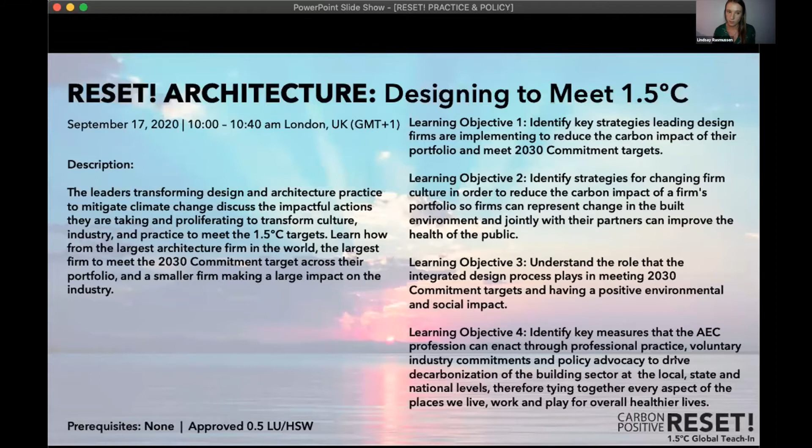Dr. Christine Lemaitre is a pioneer of sustainable building. As CEO of the DGNB, German Sustainable Building Council, Christine has set the course for better planning and building culture in Germany for almost a decade. She has been a member of the board of directors for the World Green Building Council between 2016 and 2020, and had the chair of the Europe Regional Network. She's a co-initiator of the global initiative Building Green Futures and received the Eco Innovator Award from the Global Green Economic Forum in 2019.

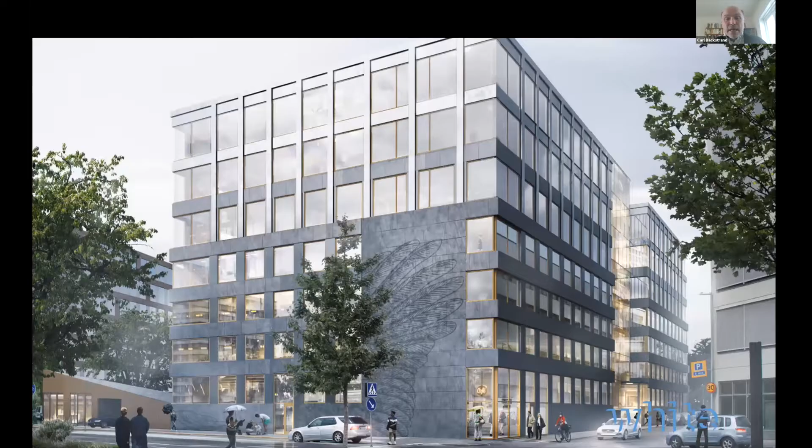Another example from Uppsala, just north of Stockholm, where two existing office buildings from the 70s are being transformed into new premises. In this project, from the start the idea was to pull them down and build new on this site. However, we managed in discussion with the client to convince them we should go for a transformation and try to recycle as much of the materials as possible from the existing buildings.

Some figures to show the benefit: this cut carbon emissions compared to new build by 3,800 tons, and we also saved approximately $10 million in cost savings on the project. One aspect of that is that construction time was reduced by 2 years compared to demolition and new build, and we all know time has a lot of effect on cost.

And then, of course, using more wood in the construction. We all know the embodied carbon, how that can make a huge change in the life cycle carbon of the building.

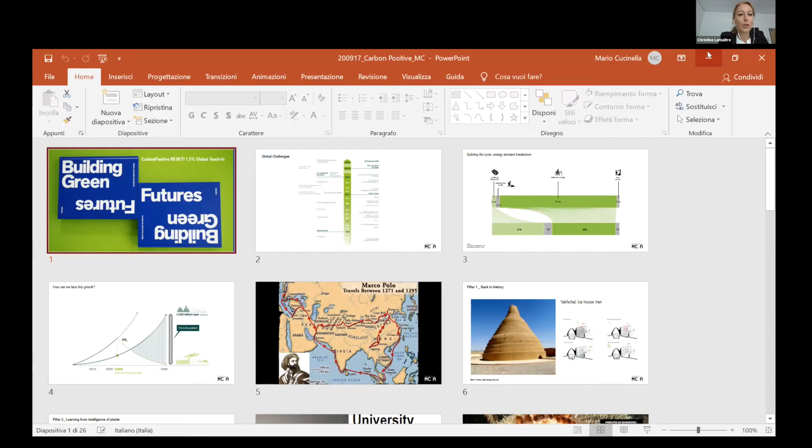Today I'm going to go through these slides very quickly. A lot of data, the problem, the complexities of these challenges - I think everybody is well aware of it. I'll try to talk about some of our work, things we've been doing for the past 10 years, and some of the lessons we're learning.

Hopefully I would be able to inspire people to understand that this is a challenge that we can realistically take on and emerge winners against. So as a firm, we are founded on this mantra that there's this binarity to architecture where it's either hurting or helping depending on how we engage with it.

And I think many on this group are part of this movement of architecture because we believe in that. More specific to the topic we're talking about here today, this is how you could relate to what we're talking about. The reason we try to frame some of these bigger topics into very simple statements that sober up, is to understand what's really at stake, because this is the goal.

I think it has been simply put, we all understand it. The goal is to limit global warming to a very specific target that everybody understands by a specific date. There are two steps to do that: we need to reduce our emissions by half by a certain date, 2030, and then we need to reach net zero by 2050. I think this is very simple, it's very clear.

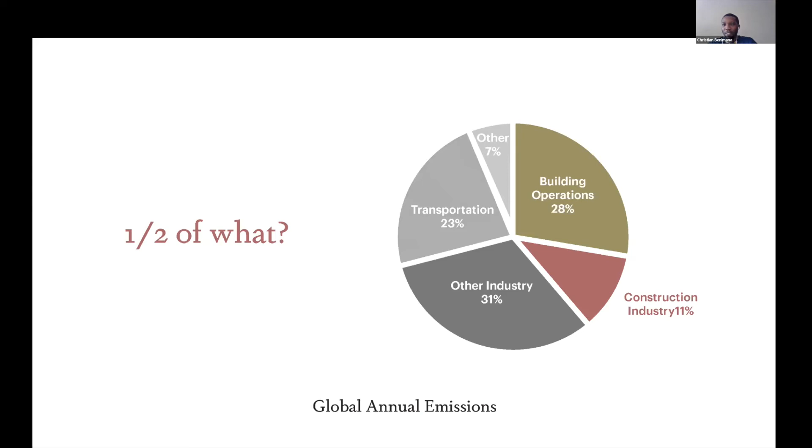So what does it really take for us to reduce our emissions by 2030? What do we have to do? The simple answer, if you think about it, is we need to go back to passive systems and also address what we're putting into the building - embodied carbon. So starting with back to passive systems, what does that look like for us?

When we designed this project, Butaro Hospital, back in 2008, in an area that did not have electricity, and it was one of the poorest places on the planet, but there was an ambition to design a state-of-the-art hospital.

I think the context kind of took care of the restraining condition that required us to think about passive systems. But in addition to that, it's very mind-boggling that we are celebrating this today. The way we were building thousands of years ago is New York Times newspaper worthy in this century.

All of these scientific targets that have led us to imagine complicated air conditioning systems are actually things we can achieve with really minimum types of intervention, allowing us to achieve maximum or minimum air changes per hour required in a hospital to function properly and control infections, while still using passive systems as much as possible. So this is very possible.

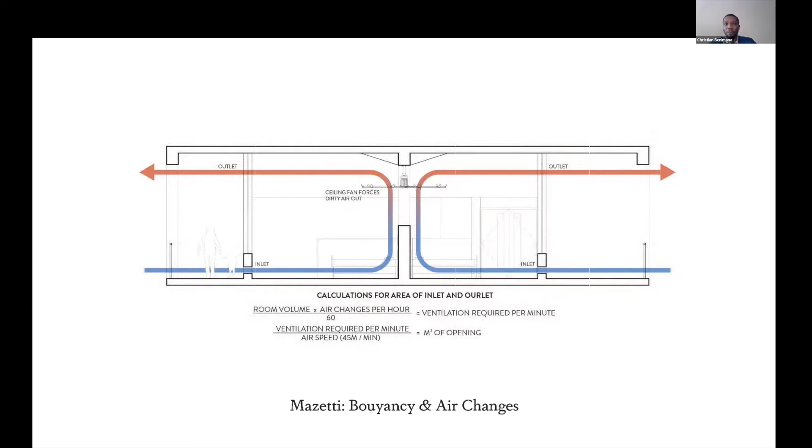Obviously this hospital needs to be elegant, it needs to function properly, but at the same time it pushes us architects to think further on how these lessons can be enshrined into laws and policies that allow many facilities to begin utilizing this at scale.

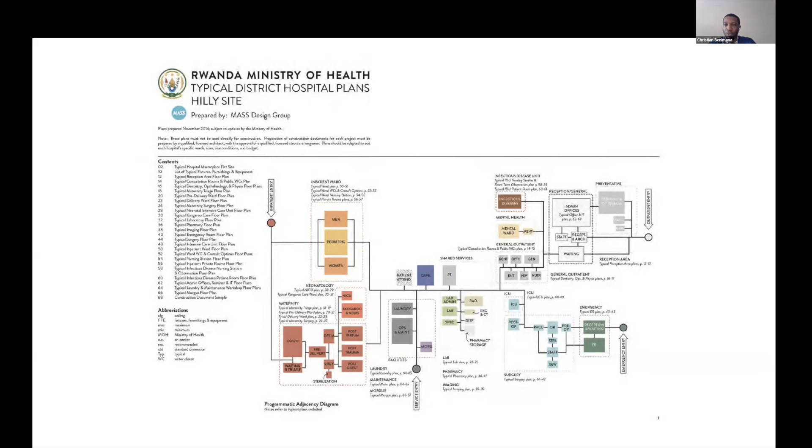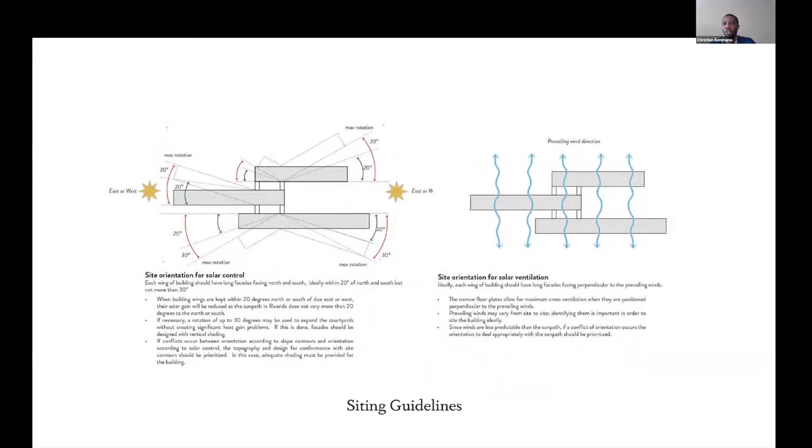This is a project we worked on with the Rwanda Ministry of Health, trying to understand how hospitals would start taking over these lessons and implement them into their guidelines, so that existing hospitals going through retrofits and hospitals that need to be built in the near future do actually prioritize this as a matter of policy and law.

This project is going to be completed this month, and it's built with the same principles. This is another hospital building in the south of the country, with similar DNA, requiring it to be as passively ventilated and as passively lit as possible.

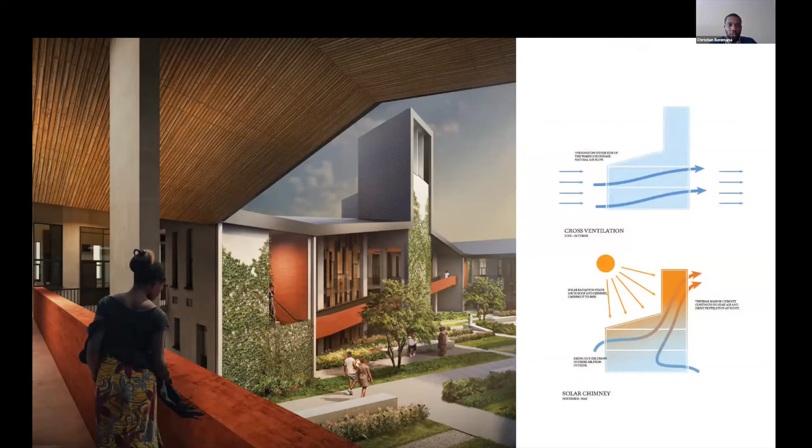This is another example, built in an environment much hotter and more humid than Rwanda, but it still proves this is possible, as it's been done 1,000 years ago in countries like Iran, what was Persia at that time, with Persian architecture that we're all familiar with.

So now, how do we reduce the carbon footprint? For us, that means we need to match the carbon footprint with the human handprint. If we say the embodied carbon is mostly associated with the materials that go into our buildings, then we cannot separate the skills that mine, transform, transport, and fix these materials into the architecture we talk about.

So what does that look like for us? It's dialed down to the same principles we've seen in other movements such as slow food or slow fashion. It has to be good, that everybody deserves it—it's a matter of social justice. That architecture has to be good, inspirational, beautiful, award-winning. It has to be clean.

Obviously this is the most talked about part, when we can quantify the numbers and say this material, at the end of factory fabrication, has this rating in terms of environmental efficiency or embodied carbon. And then most importantly, it has to be fair.

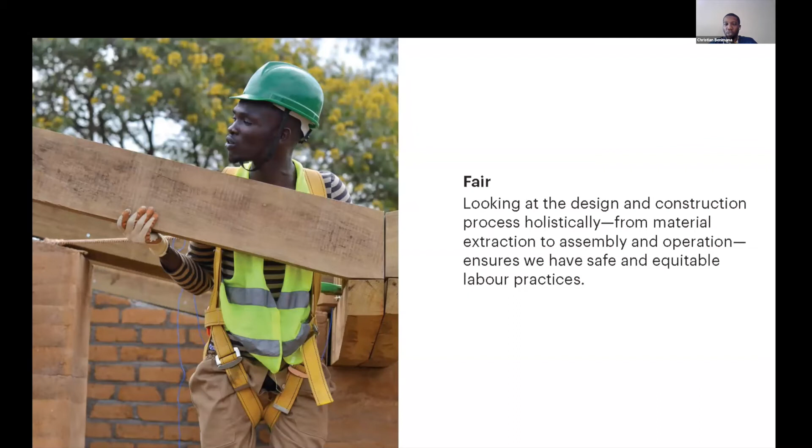And what that means is we need to look at this process very holistically—understand who mines these materials and where they come from, how they get transported to our sites, and who benefits from the entire process. This good, clean, and fair approach, we think, is the right methodology to allow us to reduce by half the embodied carbon targets we have.

So how does this footprint-handprint look in our own projects? The same hospital project I was talking about, in a rural, remote area, has this beautiful volcanic stone because it's in the volcanic region. Out of that process emerged really good talent that allowed us, by the time we finished building Butaro, to do an audit and find out that 10 years ago, we were already achieving the goal set for our next 10 years.

So this is possible even without being intentional—just focusing on making sure that what we do is good, clean, and fair as a process of deploying architecture. So it shouldn't be very difficult to replicate.

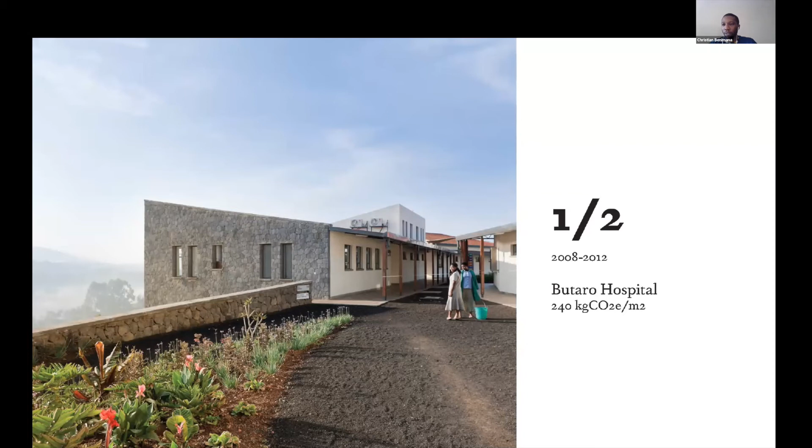And having done that, now we've committed, and I urge everyone here who's in private practice, as Carol just said, it's up to us businesses to figure out how a business model embraces this and figure out how to integrate it into our own practices.

We've taken stock of all our projects to try to understand where we are, and we are pleasantly surprised that it was half of the global average across all our projects, and we aim to continue pushing that bar down as much as we can.

Now, that is doable and it's well and fine, but what about reaching net zero? What does that mean and what does that look like? For us, it really boils down to four main points: we need to conserve intact landscapes, we need to restore ecological functions, we need to figure out how to supply foods to us as a society responsibly, and lastly, we need to grow our buildings.

And what that looks like for us can best be represented with this project that I'm going to talk about, set again in my country of origin, Rwanda, where in less than 30 years, we've reduced our natural environment by more than 50%.

Because we were looking for farmland, and the population is expected to double by 2040. So we are expecting that in 20 years from now, we're going to require lands twice the size of the country to be able to feed ourselves. So how do we figure that out, and our country is not growing. So how do we figure out that challenge?

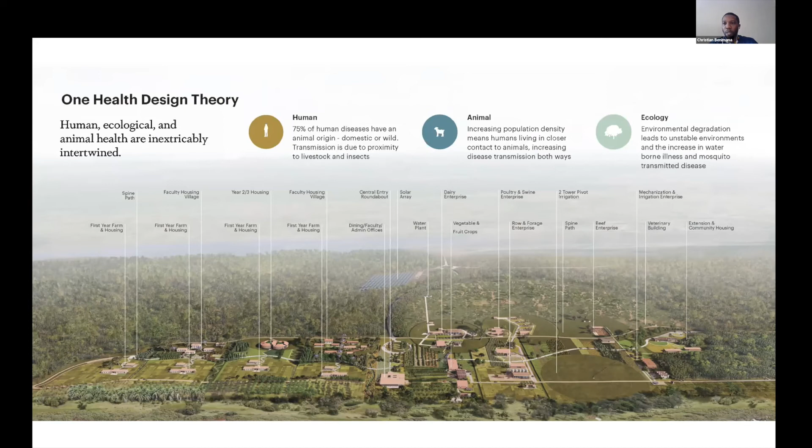To figure out how we achieve that balance, this is something that people in the fields of veterinary sciences and ecological sciences have kind of understood and have put into practice for a long time, but hasn't really trickled down into construction. So how do we also make sure we participate in that process the same way?

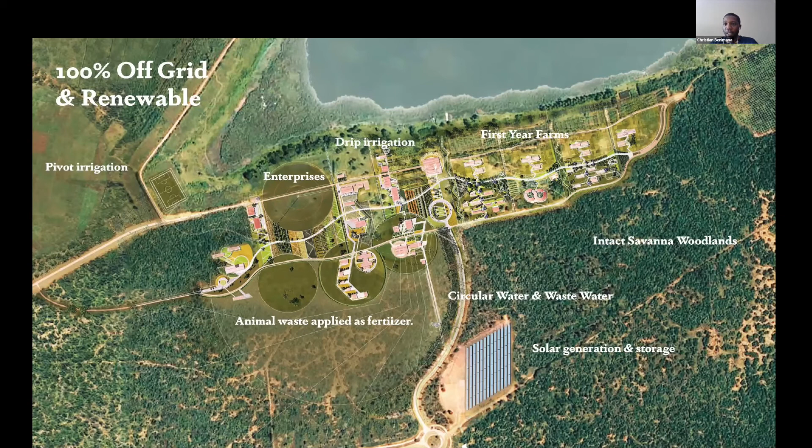So landscape conservation, restoration, and regeneration is something we started looking at from the outset, looking at where the buildings are going to be and how the entire campus from a master plan scale and standpoint is 100% off grid. And that takes care of reducing our operational carbon significantly, in trying to meet that half as soon as possible.

But more importantly, the embodied carbon—we need a very big mind shift into what goes into our buildings and how they're built. What are the elements of the architecture and what makes it? So we are going to be able to achieve this, but not with business as usual. We need to change fundamentally how we understand the supply chains that make our buildings.

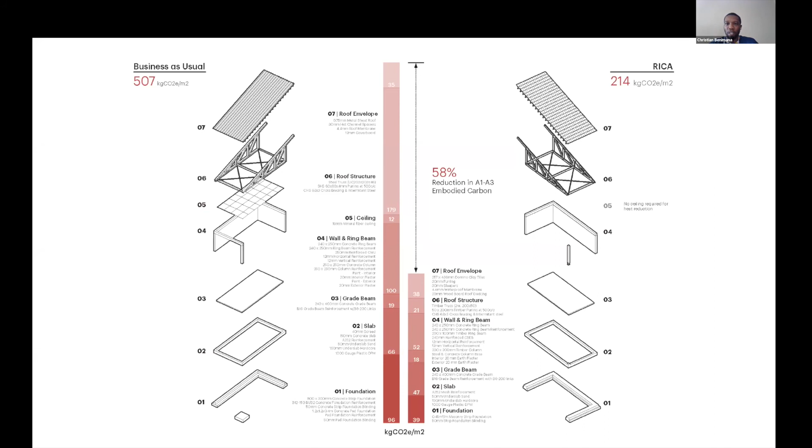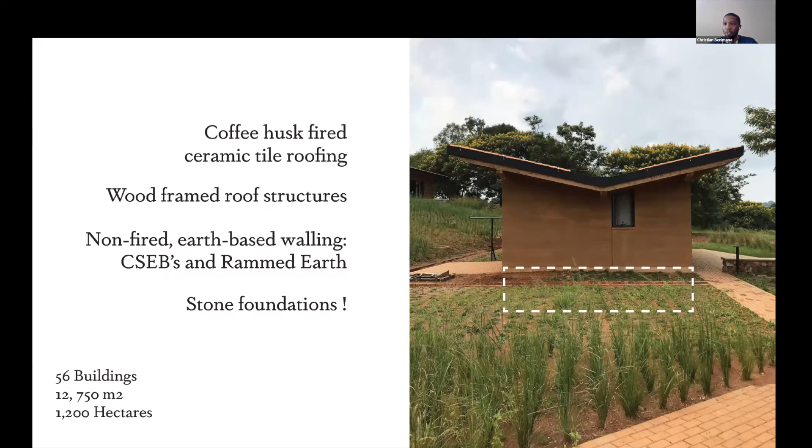And for us, what it looks like is to go back to how we used to build hundreds and hundreds of years ago. Figure out how we used to fire clay bricks, how we used to source materials for structures using wood, of course sustainably harvested, using earth for construction and stone foundations. So minimizing as much as we can on cement and steel.

Sourcing labor, of course, as close to our construction site as possible. Rethink finishes so that we do not continue to consider that speccing materials from catalogs from factories in China and Turkey is going to help us get there. But also making sure that the trades and materials that are fundamentally not embraced in the construction industry are actually brought into this industry to help reduce some of these things.

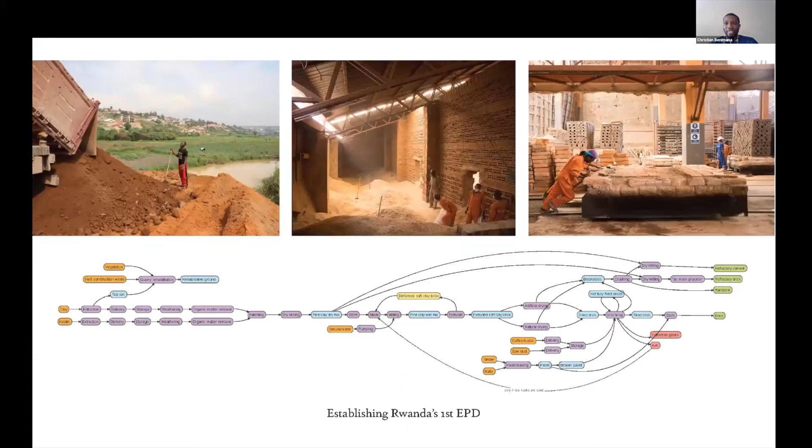Okay. Sorry, am I going over time?

Yes, and Mario, I think, is still back, and we just have, yeah, then 10 minutes, so 8 minutes for Mario. It's a fascinating presentation, I could listen all day, but yeah, unfortunately.

It's all right. I just want to say this last thing about this project is that we anticipate that we're going to be carbon positive on this project in 6.05 years from now.

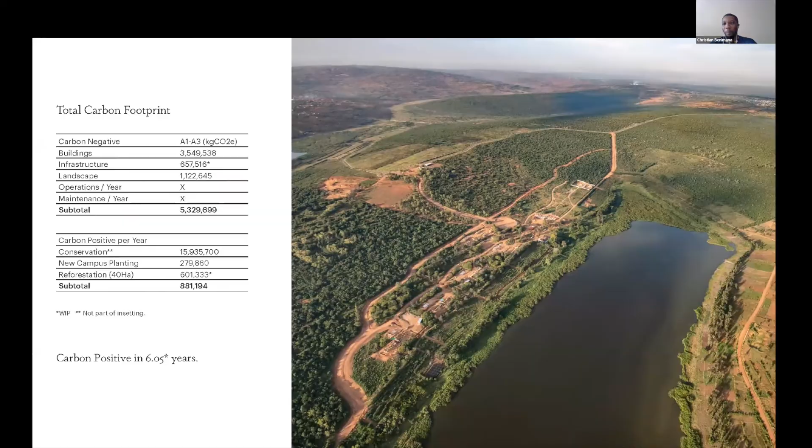Okay, so we will check back on that. Thanks a lot, Christian, and sorry for cutting in. It's digitally always a bit challenging.

Mario, are you on? Yes. Yes, we hear you. Can you share your screen? Great, yes, I'm doing now. So now you have to be 8 minutes precise. Yes, and I think there's almost no time for Q&A, but we'll see. So Mario, please.

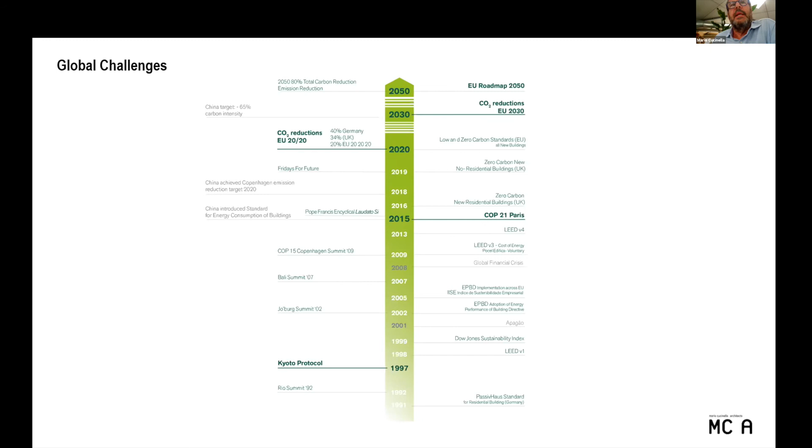But the question I want to raise is that in the last few years we've been concentrating on the performance of buildings - the kilowatts of buildings. We're already at a good point to make new buildings very high performance. But with this diagram, our research group is discovering that if the life of a building is 70 years, 47% of the CO2 emissions already occur in the construction process - the material and the way you build - and only the remaining part is about performance. So the idea of using and reusing material is quite fundamental for the future. We need to concentrate on materials, construction methods, and performance - these two things need to work together.

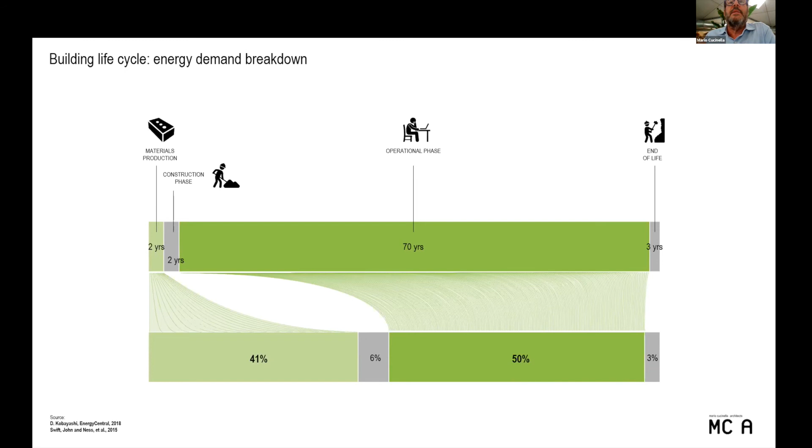But the paradox of this situation is that the curve of CO2 is still growing, the population is still growing, and Europe said we want zero energy buildings by 2050. So this is our problem - the gap between the ambition we have and the program we have. How are we going to do that? Today we've listened to a few colleagues who are really working on this, but I want to raise a point.

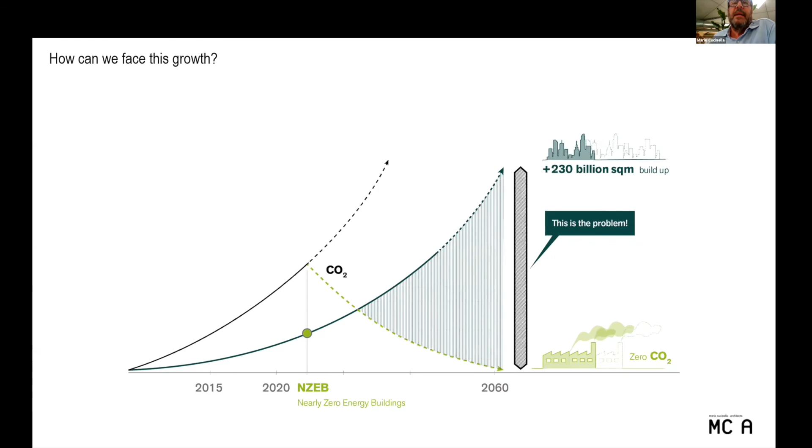If we want to do buildings with zero energy, maybe we need to look also to our past - before energy. How did we build for many centuries, how did we make buildings with high performance and very empathetic with the climate? So I want to tell you two little quick stories.

That for me is the lesson from the past. We don't want to do that again, but I like the idea that if we look to the future for a completely different approach in building, maybe we need to also study our past, when architects were able to find this complicity, this empathy with the climate.

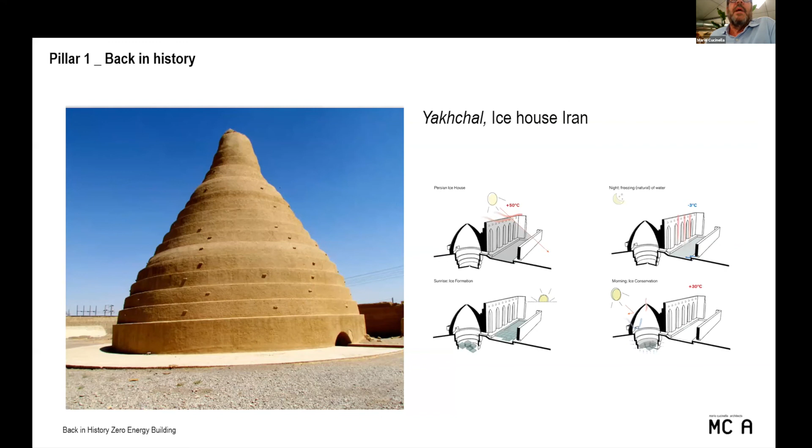Another thing I'd like to raise is that we always look to the future, thinking we're going to find some solutions there. Why don't we look around us? Plants and buildings have the same problem - they don't move. When you make a building, it doesn't move. Plants are the same. They've been on the planet for 400 million years and have adapted to climate because they're not able to move. So they create conditions - the shape, the leaves, how they look for roots, how they find material. It's very intelligent.

If you look at the work of Stefano Mancuso, a scientist working on the intelligence of plants, you discover that plants have intelligence because they know where they are. They know how to adapt themselves to climate. If you look at buildings, on the other hand, buildings are not intelligent at all.

To make a building work, you need to put in machines and use energy, so the building is not intelligent itself. But I'm sure if we study well, we can make a different building, because we control the material, the shape, and the relation with energy outside, to make our building intelligent without too much technology. Maybe the lesson from the past tells us a story about how we can find knowledge.

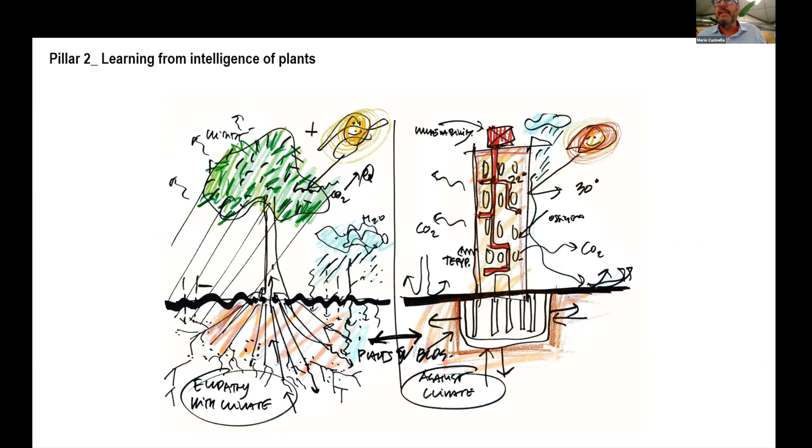That's what we need: knowledge, not technology. Maybe we should study what is close to us, plants. They tell us a lot about adapting to climate. I'm just quickly showing a project we did in Morocco, inspired by cactus.

Also, the spines are not only a defense against animals, but they catch humidity in the air and bring the water inside the plant. You can imagine how many thousand years it took for plants to be designed and adapted to extreme climate. For me, that's a very interesting lesson.

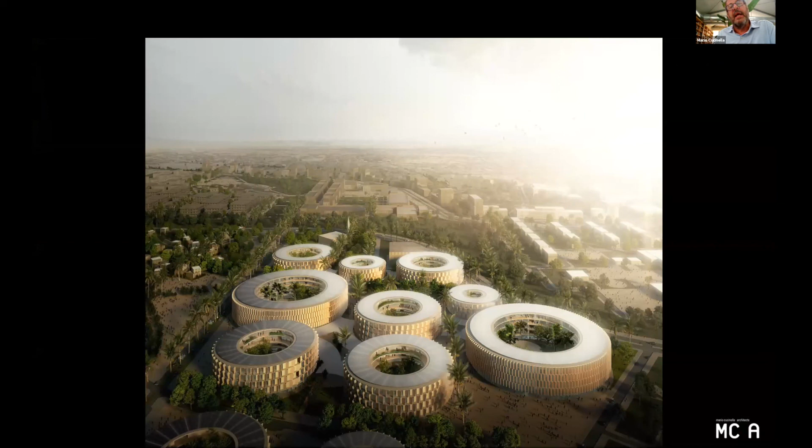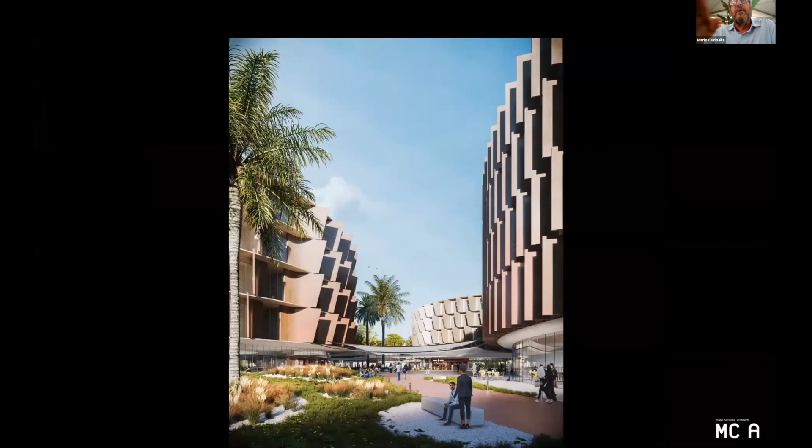Maybe we need to study a little bit more what is close to us. So this is a campus, not a cactus of course, but the oasis in the middle is where we concentrate water and plants, and the shape of the facade is in terracotta, in clay. Clay can absorb humidity and release it later, cooling the building. So there are so many inspirations from the vegetable world, the plants around us.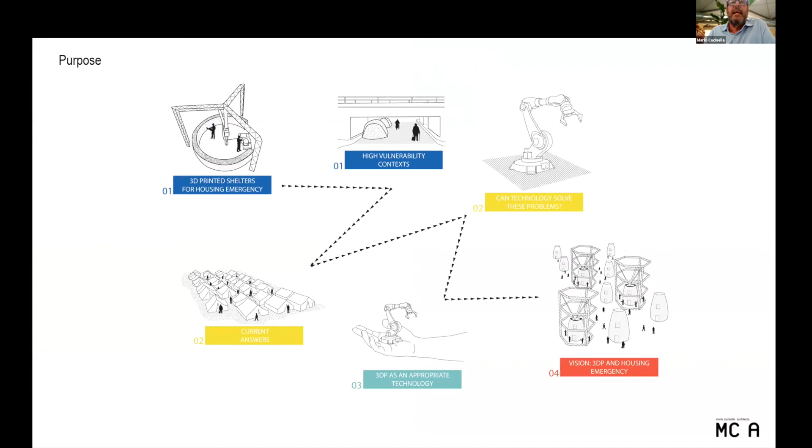How we can design a building in different climates, in different latitudes, and use technology to make that better than a tent or a container. So that's the idea: you make a hole in your land, put in the machine, and design the building adapting to different latitudes.

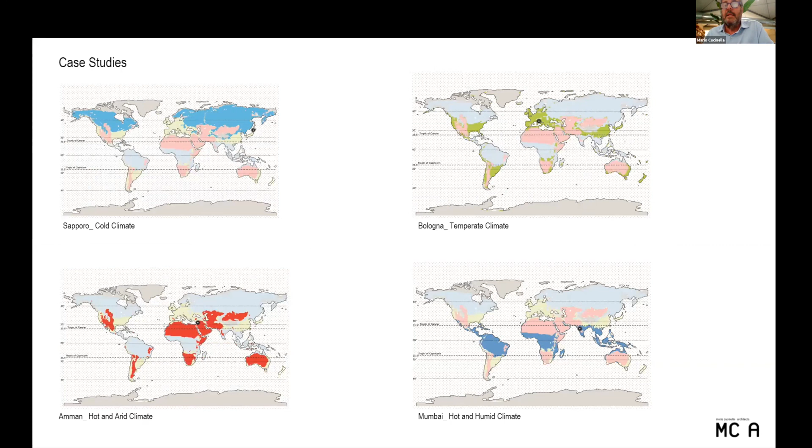We have studied different latitudes, and there's a different answer for each one. The building is not the same. In the subtropics, for example, one increases ventilation by creating a chimney effect. In the north, you want to open a big window to catch as much sun as possible and bring it inside.

So for me, technology innovation is about design. It's not just about tools—it's tools plus design plus modern technology, and knowing how. I think this opens an extraordinary story between us and our past, to look into the future.

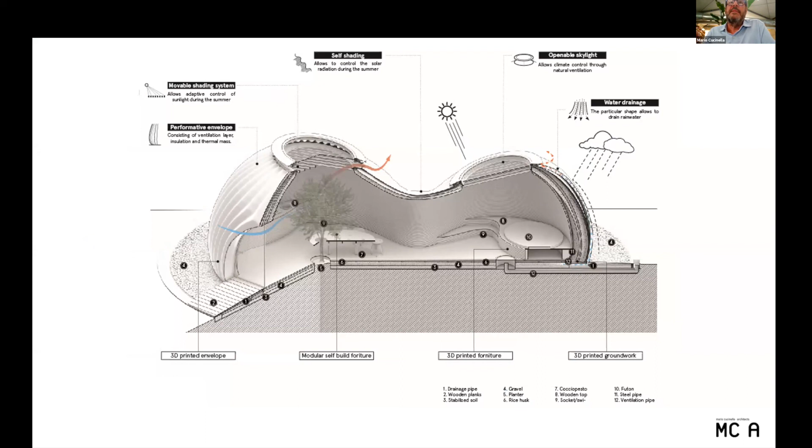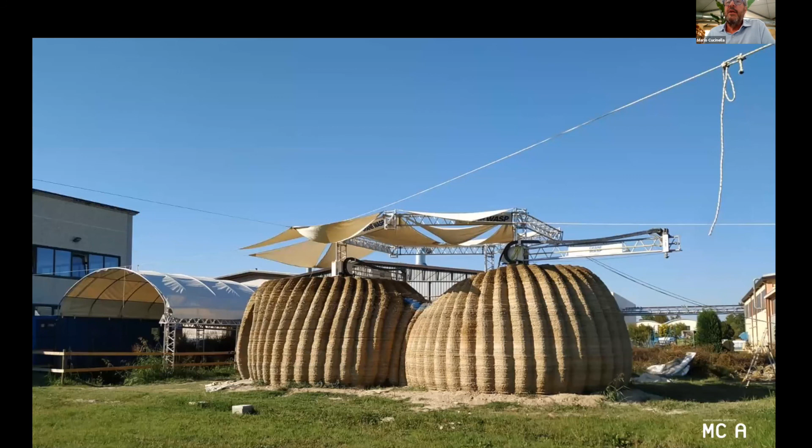And that's the picture of that house. When they finish the house, it goes back to the earth. That's the house being printed—no energy used, just earth and high technology. I think this is something we need to think about for the future.

Thank you very much.